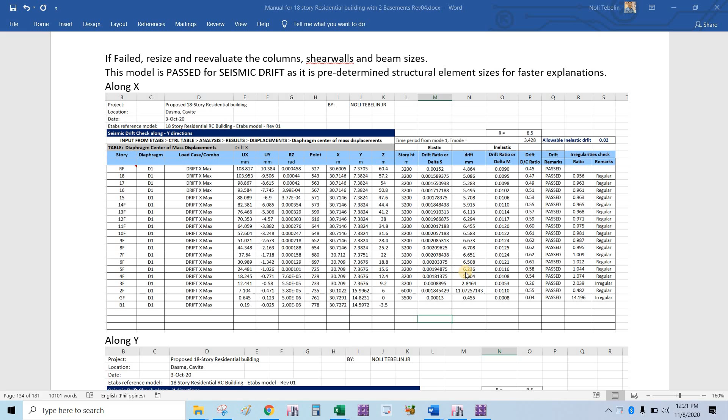We check the drift, so this is in the manual. I'm on page 133. This is the result, and we have irregular values because we have 2 more than 1.3 on the drift ratio of above floor to that floor level, more than 1.3.

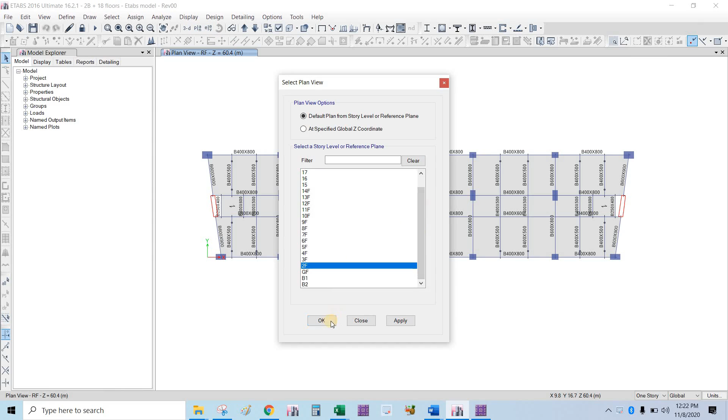So that is irregular. When you look at the model, going to the third floor then second floor—the geometry of the third floor and the second floor is this much larger. So that is irregular based on center of mass drift checking.

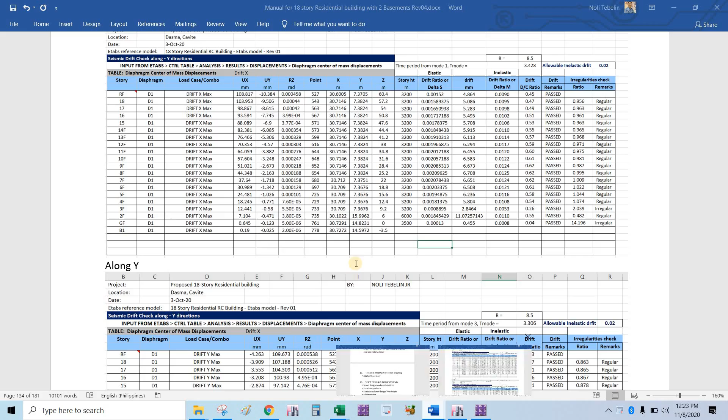Now, according to the manual, structural irregularities are being checked for 1.3 above ratio of upper floor to lower floor drift ratio—those are irregular, so more than 1.3. Then the design base shear should be 100% and cannot be reduced to 90%.

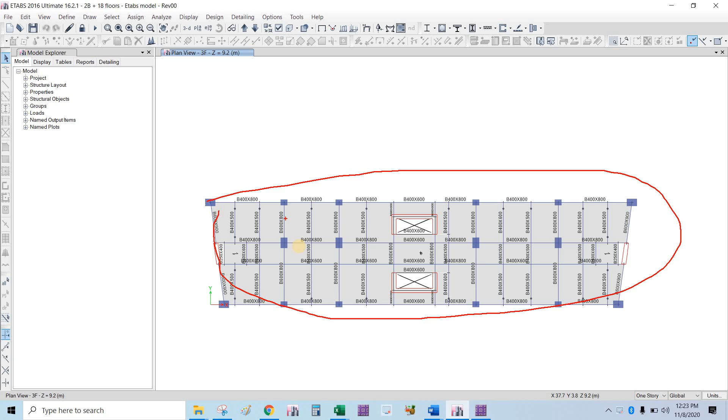For example, if our building up to the ground floor maintains this footprint, basically there would be no irregularity. Then we can reduce the base shear, or the dynamic base shear, up to 90%. So how do we do that?

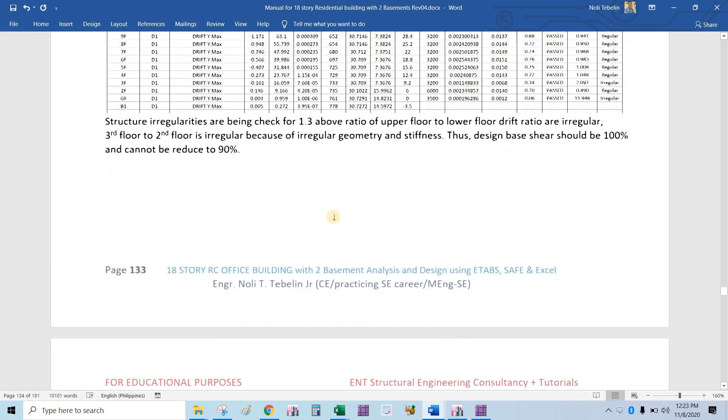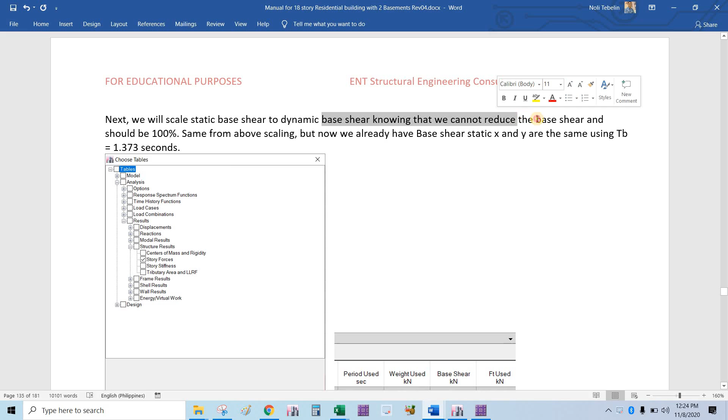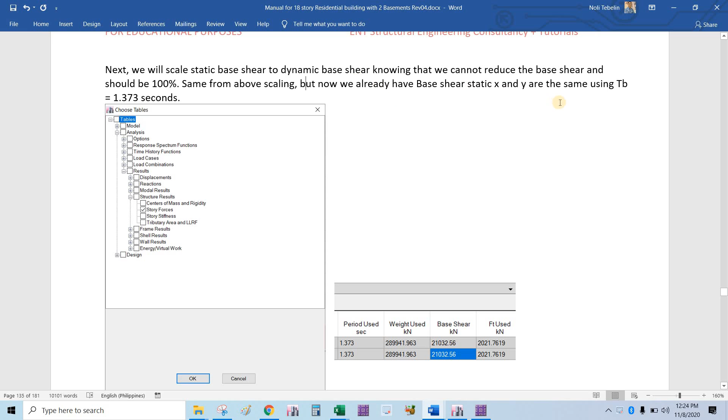We will scale the static base shear to dynamic base shear, knowing that we cannot reduce the base shear and it should be 100%, same as the above scaling—same as the scaling for the drift. But now we already have base shear static X and Y, which are the same using Tb.

1.373—this is our period used. Then what we used for drift is the fundamental period, or the actual behavior, actual period of the structure.

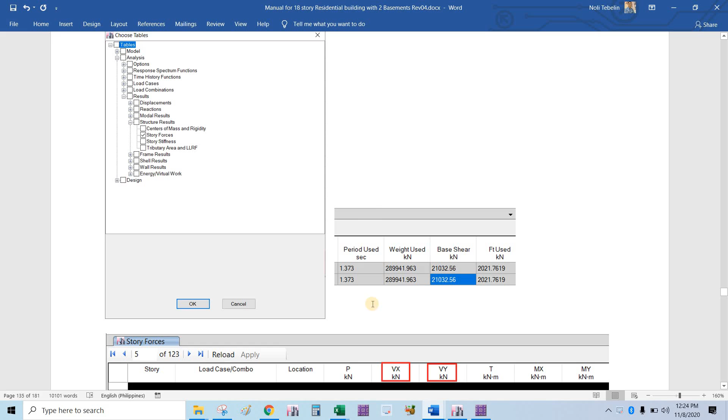That is from the model analysis. And for the design, if TA is greater than this point, this is CTHN, HN raised to 3/4. If TA is less than the time period of the mode,

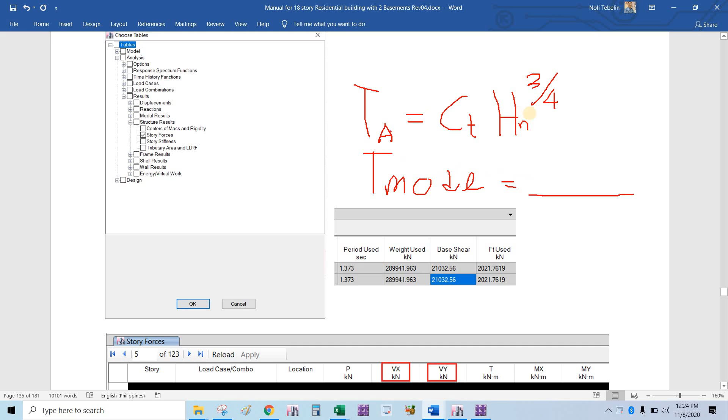If TA is less than the period of T mode, then use TA for the design. But if the time period of the model analysis is greater than TA, then we will use TB.

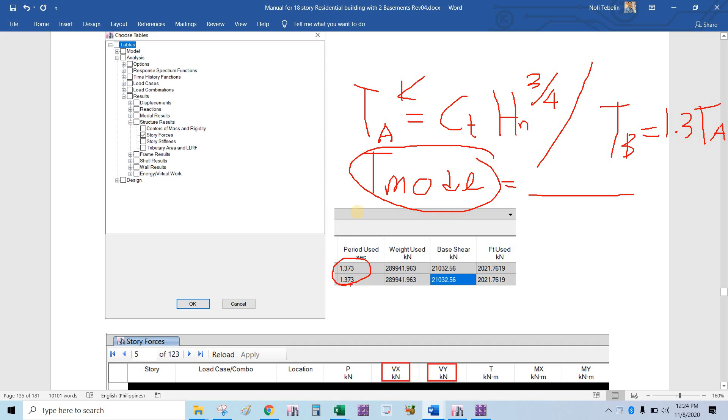But TB is 1.3 times TA. So what results here, as computed in video number 18, this is TA

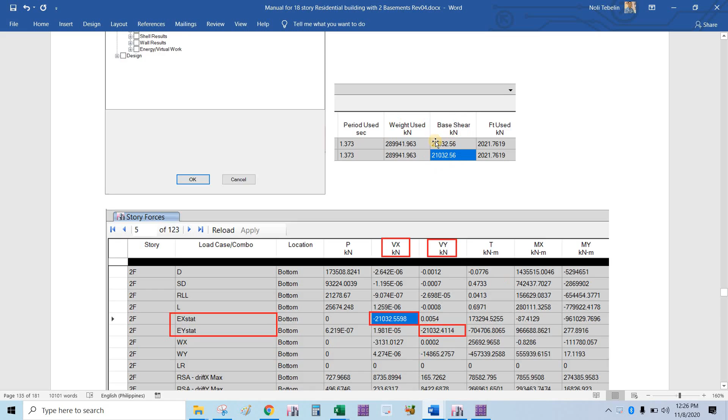times 1.3. So moving on, we have weight used, or seismic weight of the building, and also we have base shear. But now, for the design base shear—this is the static base shear—we will have a response spectrum base shear, so that is dynamic base shear, which will be used for the design.

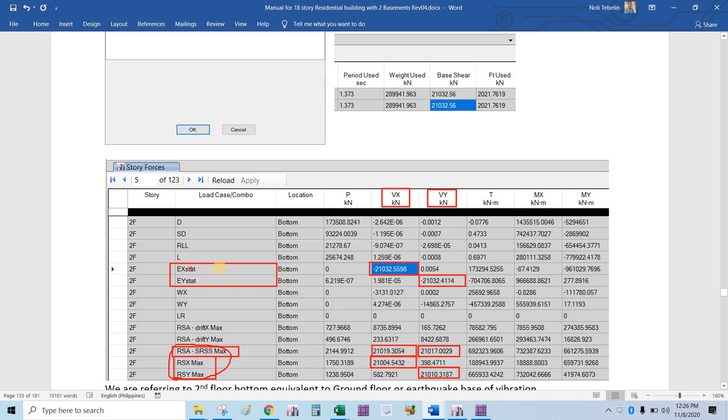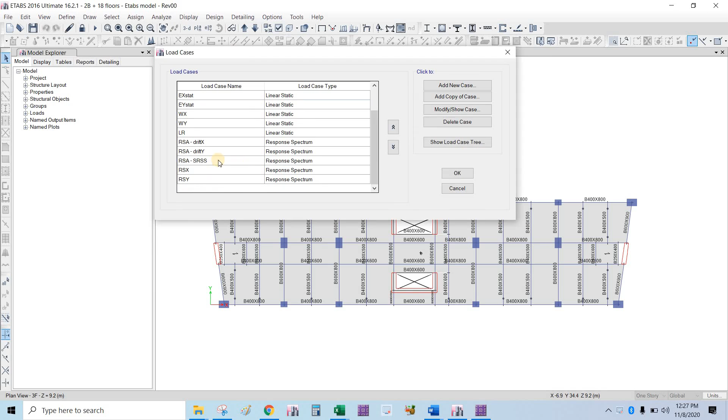So let's scale now. For example, in the model, define load cases—I'll just bring it back to the default 9.81 or 9,810 initial value, because it was already scaled. So let's return it to the initial value of 9810.

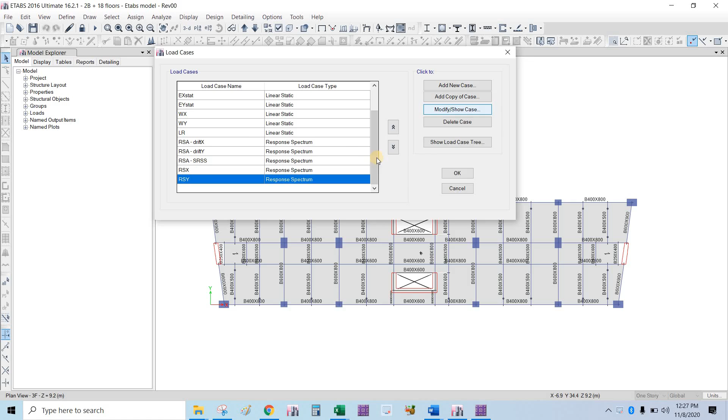For example, this is the initial value, then we'll just re-run this. Basically I'm just returning it to default so we can perform the scaling of static to dynamic from default. Click OK, then click OK. We will run the analysis.

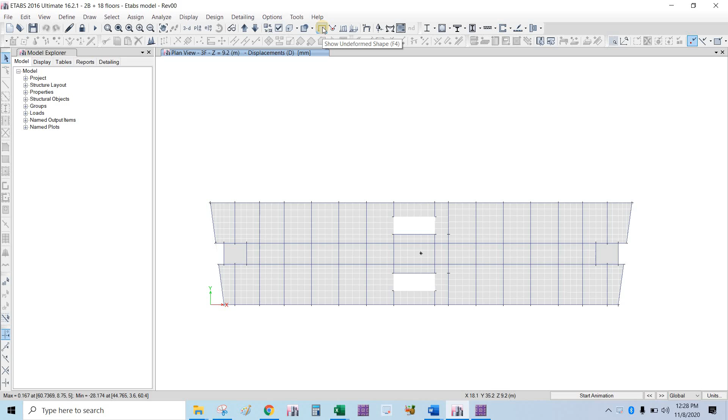Okay, so the analysis is done. Now I'll just undeform it. Then go to define load cases. Okay, so here, it's still the same, 9.81. Now, we will scale the static to dynamic.

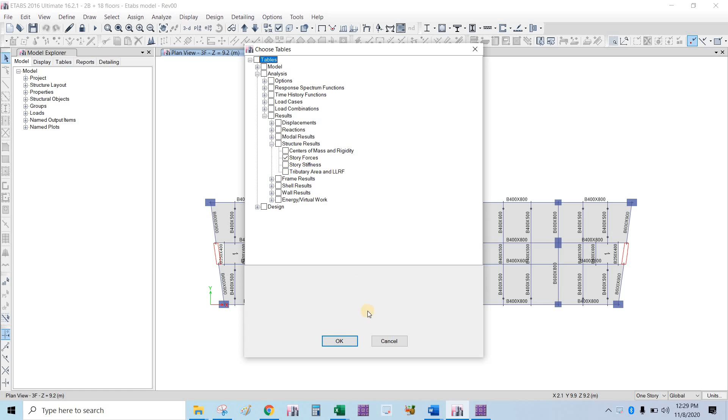Go to show tables, then go to story forces results—structure results, story forces. So that's it: analysis, result, structure results, and story forces. Story forces, click OK.

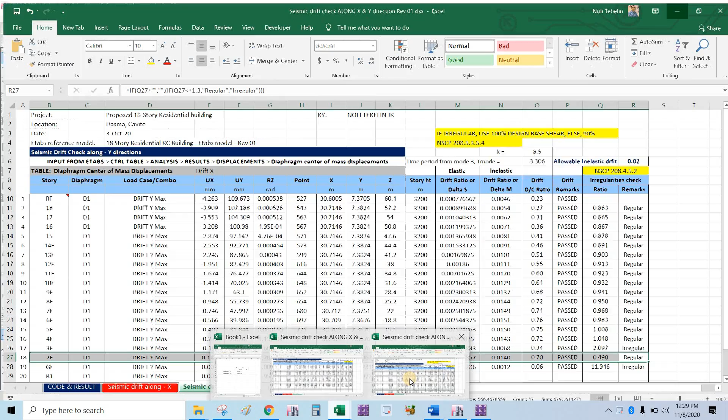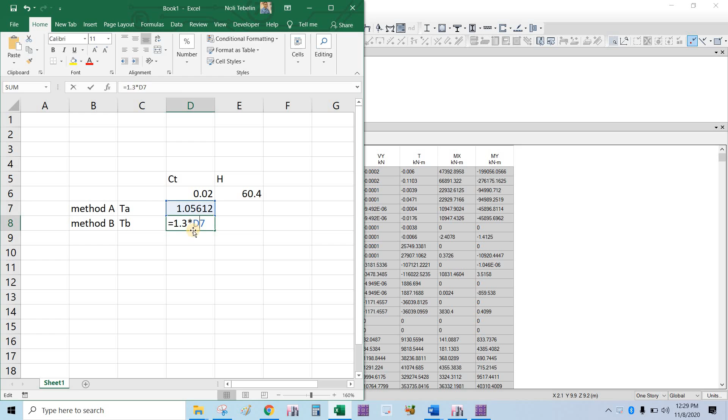Then we will wait for the table. So I'll close this dynamic Excel file. This is the earlier one—TA and TB. This is just 1.3 of TA. Let me close this too.

Now we are here in the story forces. First, go to location, right-click, bottom. Then story, right-click, second floor. I'll press 2. Okay, then escape. Then here are the load cases and load combos.

So, dead load—for dead load, this is the axial here, these are the axial values. These are the lateral values, then torsion, then moment about X and moment about Y.

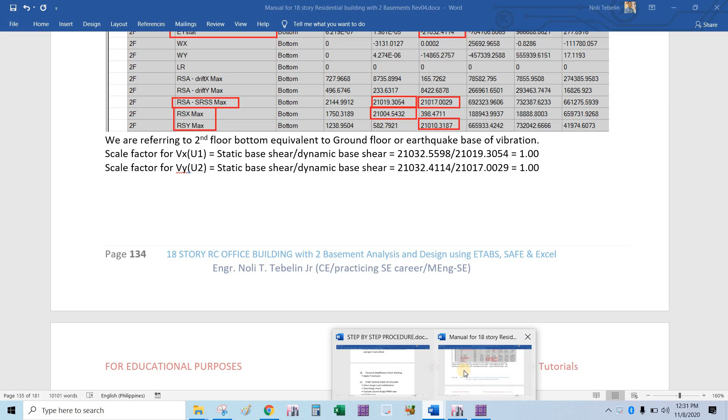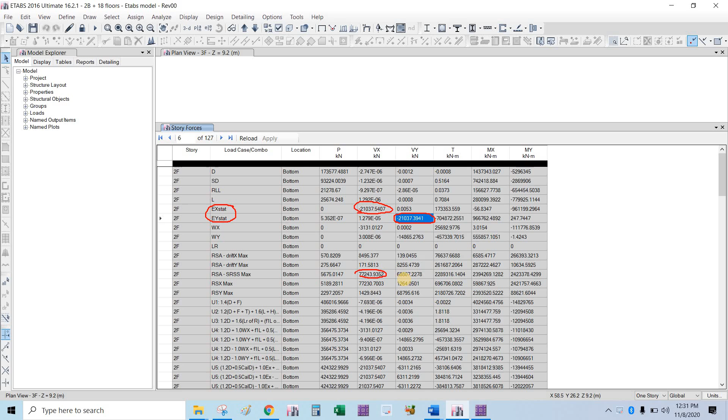Okay, so for our static shear, this base shear—21,037, that value, 21,000, this one—that's our static case. So this should be what we call normalized here. So this value should be the same here, and this is the same here. Also, for RSX, same there.

This is the same here. Okay, so that's our aim. We'll divide the static by the dynamic.

Then we will multiply that factor to the load case, the dynamic load case. So I'll right-click here and export to Excel.

Okay, so I go back to Excel, Control C. Then this one, multiply by the scale factor for the Y direction. Then I just click the tab.

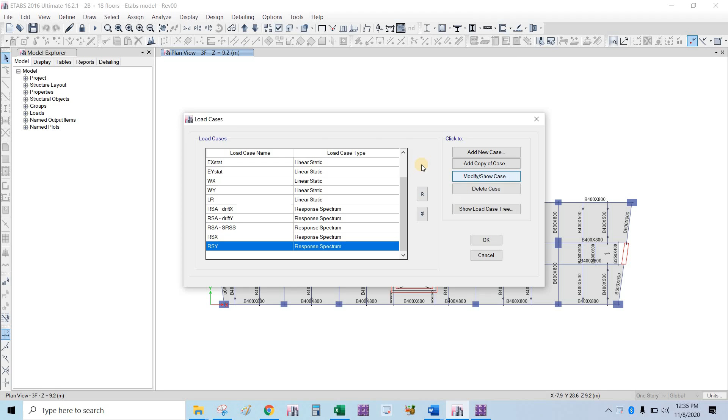Then this is our scale factor now. Next, click OK. Then for RSX or RSY, since I already copied it with Control V.

Then click OK. Then I go to RSX. I copy this with Control C.

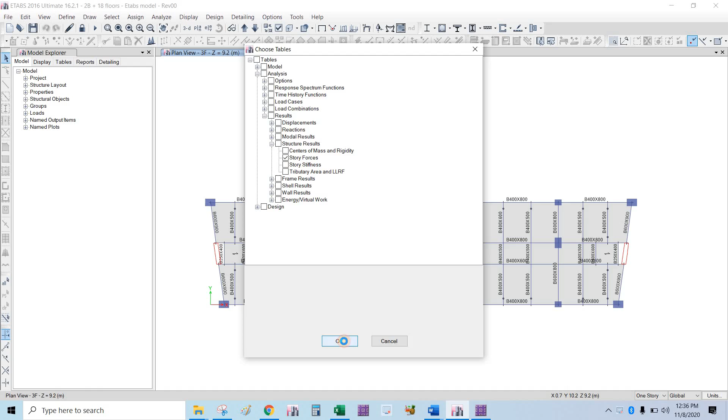So we will wait for the analysis to complete. Then we will go back again to tables, story forces, second floor, and we will observe and see the value.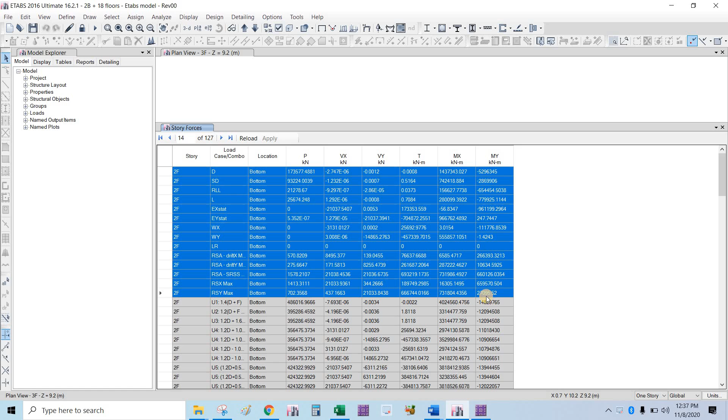I'll find it up to RSY Max. Copy, then I'll just replace this. Control V, okay, here it is.

0.999, approaches 1, approaches 1. So it means it's almost equal now. You can see, that's 21,000.

For VY, this is 21,000 and then this is also 21,000, 21,000.

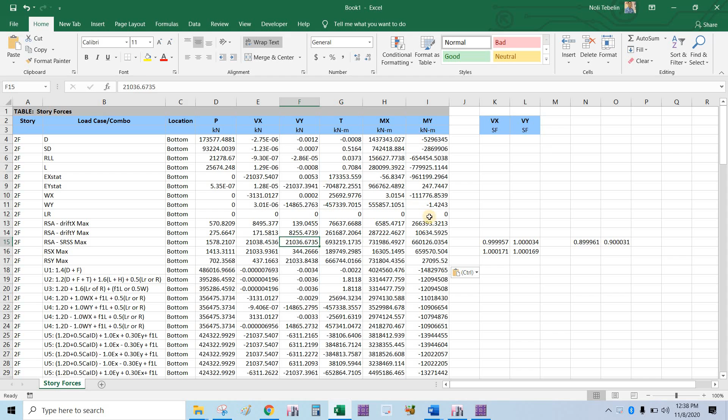So by doing this, the static and dynamic are almost equal, or 100% scaled. Okay, so I'll close this now, don't save. So that's our scaling.

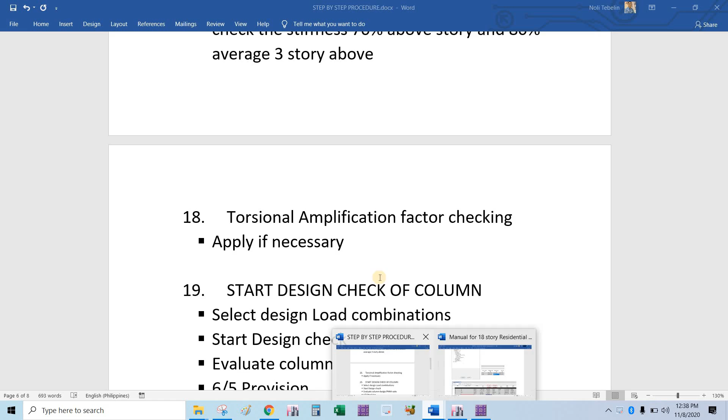Then, comparison of static shear to dynamic shear. Okay?

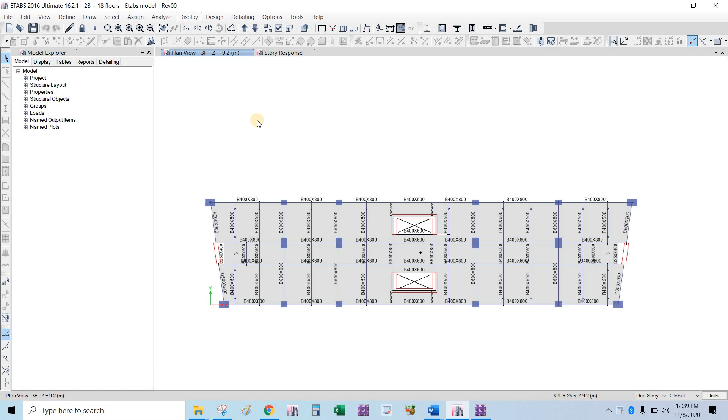Okay, so we have EX static. Then let's go to Display again, Response Plot, Story Response Plot, then Story Shear.

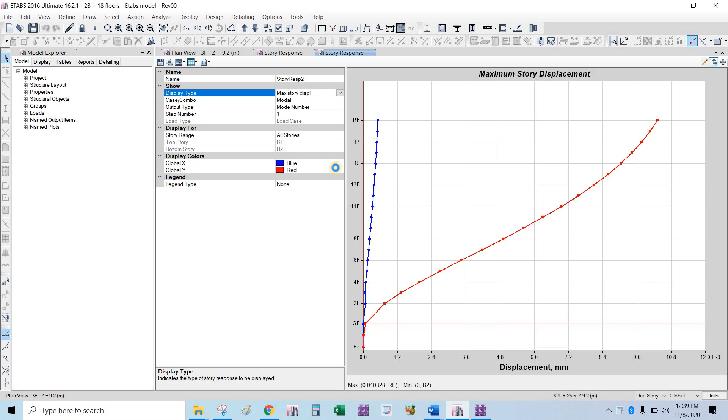Then we can go to SRSS, RSA, SRSS. This is the square root of the sum of the squares.

So you'll notice the plot of the static story shear is almost linear. You can see the base shear there is around 21,000.

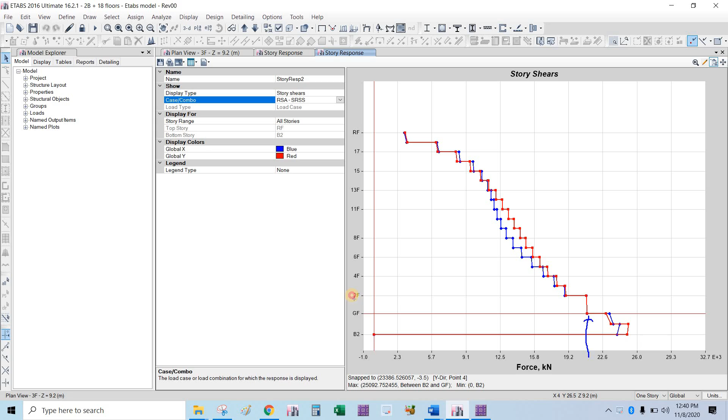That's where our scaling is, at the second floor bottom, which is the ground floor.

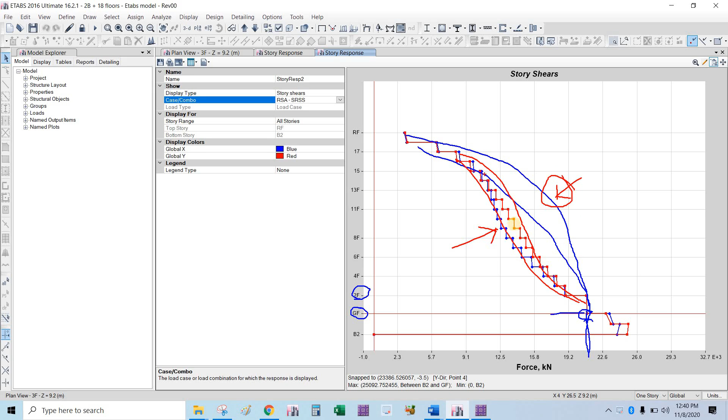With dynamic, this comes from the stiffness of the columns and walls, the masses, and the displacement consideration. For static, the consideration is the masses of the story and the height of the building, the story height.

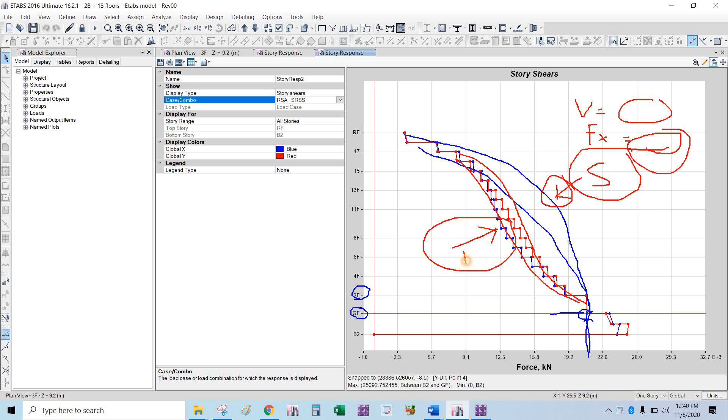Okay? So I hope it helped. Next tutorial is vertical irregularities check.